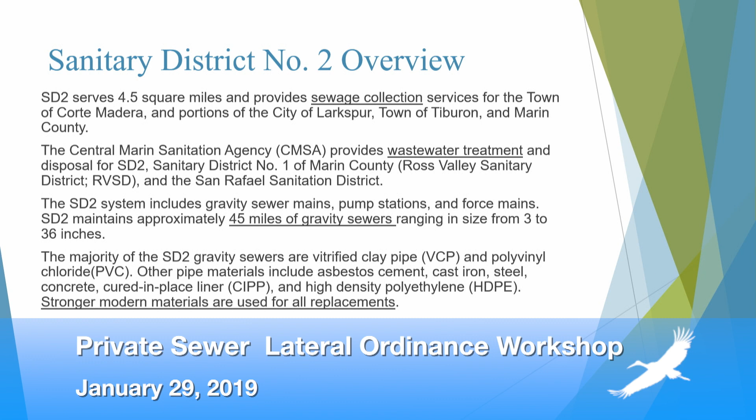This is just kind of an example of when you see these really wordy slides - what matters to me in the delivery of this is that you know that Sanitary District 2 is a sewer collection agency. We don't treat wastewater. The Central Marin Sanitation Agency, they do the treatment, right? So we deliver the sewage to them. They charge us around $1 million a year to treat the sewage, and you all pay for that through your sewage fees, and they treat the water.

A little bit, so you know how we have a gravity system, we have pump stations, we have force mains. Does everybody understand the difference between a force main and a gravity main? A force main is pressurized, so it has to be watertight. We force sewage water down the main at pounds per square inch, anywhere from 10 to 100 PSI. So if you pump up your bike tire to 100 PSI, that's a lot of pressure in there, right?

One of the things that's interesting we'll get into is sometimes some of our pump stations pump through the force mains at such a high pressure that the other mains that come in downstream can't force enough water in there. So we're having to upgrade our pump stations downstream simply to be able to have wastewater enter the system when there's high flows because the force is so high.

We have 45 miles of gravity sewers. One of the things that Fernanda, Todd, and I are working on is that vitrified clay pipe was the standard from 1900 until about 1970 or 80, and it doesn't hold up well. It does fine if there's no change, no settlement, no weight. Clay pipe can do fine, but for the most part, almost all of our clay pipes crack and break and are imperfect. So when I say we're going towards stronger, more modern materials, that's because we know we can do things a lot better. As we replace portions of the sanitary district gravity mains and force mains, we no longer allow clay pipe. You cannot replace anything with clay pipe anymore, it's outdated technology.

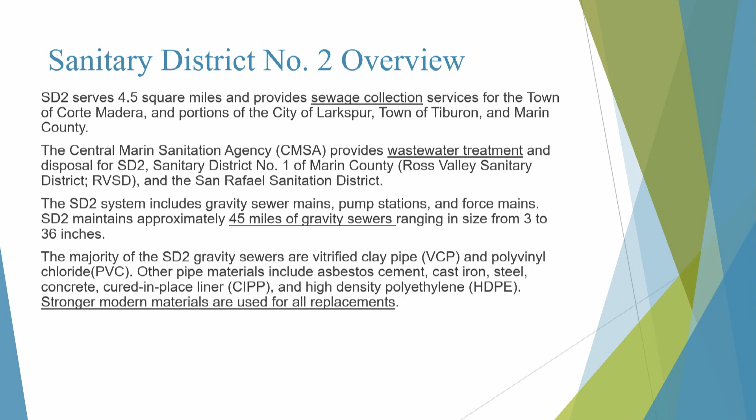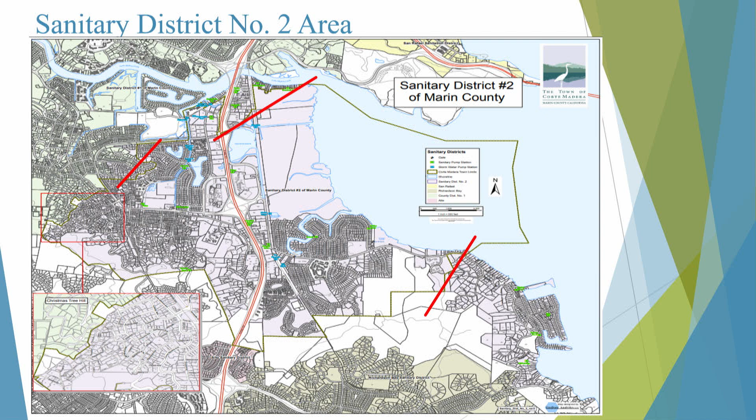So SD2 is a subsidiary district of the town of Corte Madera, but it is larger. We have about 5,800 laterals within the district. I think it's more like 4,000 or so single family homes in Corte Madera, but 5,800 laterals. So you can see how much larger the district is.

On the pump stations, we have 19 pump stations. Sometimes when you follow sanitary district or council items, you hear this term pump stations. This is just how we move the water, in this case the wastewater. We have 10 flood control pump stations and 19 sanitary district pump stations.

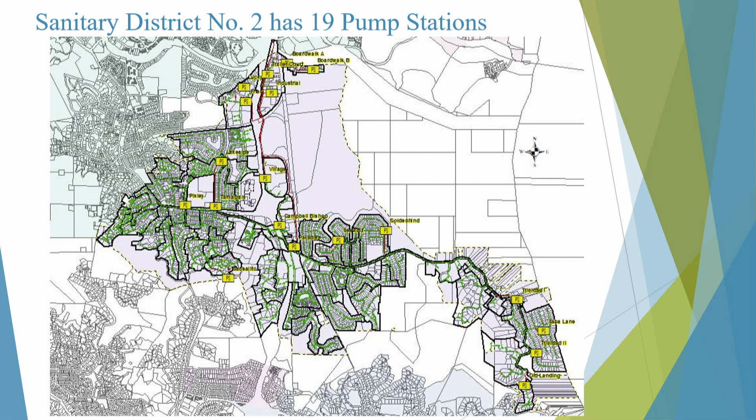Does anybody know what the largest pump station is for the sanitary district? Guesses? Paradise. Todd knows, Paradise. So here's all of them and the areas that they serve, and you can kind of see we have them all named.

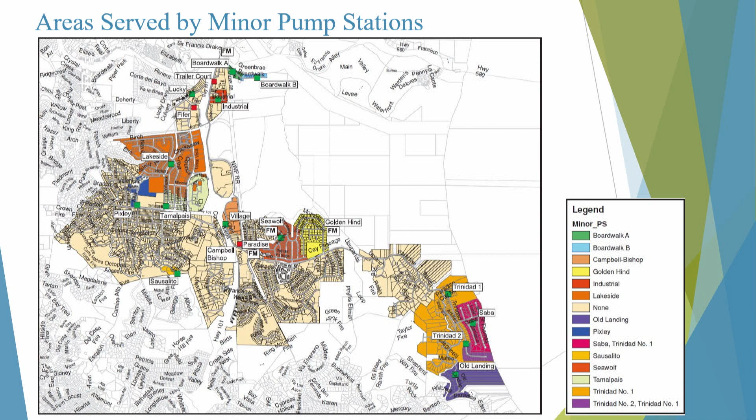One of Fernanda's jobs right now, since she started working with us on July 1st, is to evaluate the age, functionality, and control panels of how all these pump stations are working. What she's told me for the last 6 months is a lot of them need work, a lot of them need replacement, a lot of them need new control panels. So we're using your sewer fees to invest in the system.

So here's just how much Paradise is. Of all the pump stations, they feed Paradise. Right now we estimate around 90 to 95% of all effluent comes through the Paradise pump station. That's about a $20 million facility, and it's state of the art.

One thing we should do is have a tour of it. I would love to set it up, to open it up to the community and walk you all through it. It doesn't smell great, but it is fascinating to see how the pump station works.

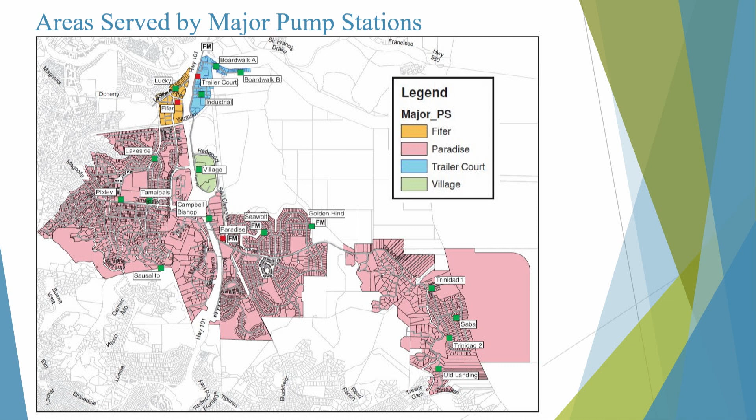So this is that example I was giving you. Fernanda is managing the Fifer pump station upgrade project right now, which is $700,000.

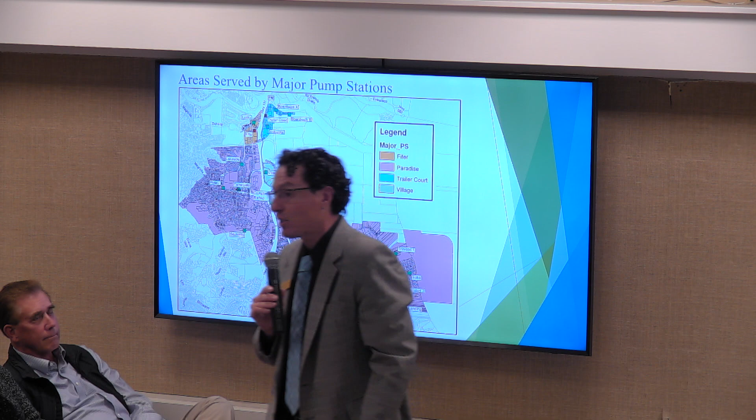One of the problems we have at Fifer is in the wintertime when Paradise, the force main for Paradise runs this way, and we deliver everything to CMSA up here by Larkspur Landing. But when we have heavy flows and all the pumps for Paradise are pumping, Fifer tries to pump water into the main and they can't get it in. So that's a problem, right? Then Fifer pump station backs up, and we've had that issue. So it's one of the reasons why we're upgrading Fifer.

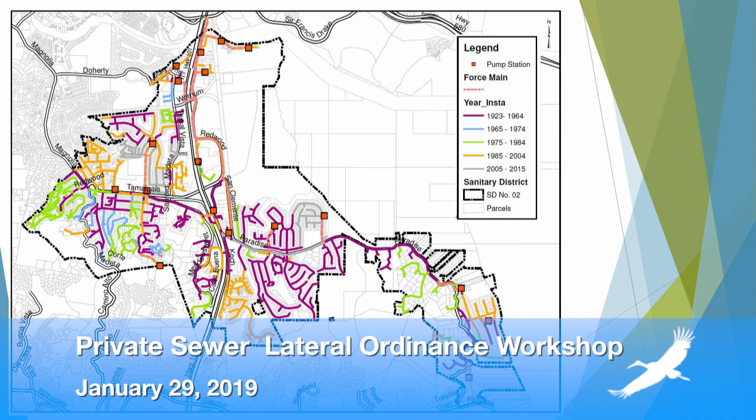Another way to look at it is the year installed. Fernanda's really good at GIS, Geographic Information Systems, in this map. If it was installed between '23 and '64, it's purple. The newest ones are gray, so that's the age of the system. This helps us understand one of the tools we use to determine where to put investments. The older tends to be the need of most investments.

So to the PSL, the purpose of the ordinance is to provide for the operation and maintenance of SD2 wastewater conveyance, right, because we just deliver the water, and the treatment facilities, for more safe, reliable, and serviceable manner. You all know the board adopted the ordinance on June 4th, and they asked for more outreach, they want the community to know more about it. So we're a little late to the game, but we're happy to do this workshop and others if needed. The other point is that the ordinance affects all property owners in the area.

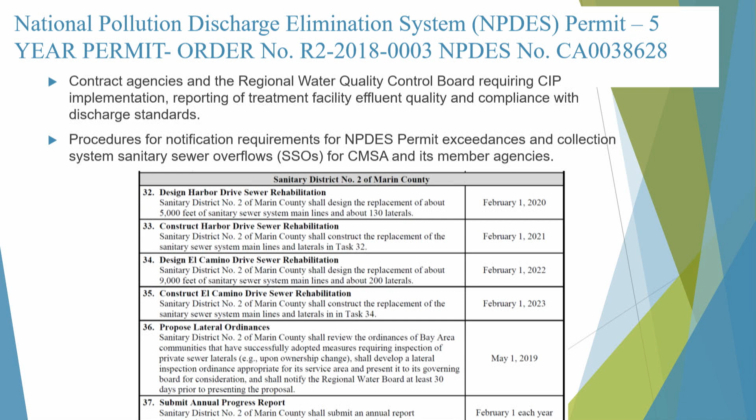Fernanda found some great graphics, which is another reason we wanted you to have this handout to take home. We use the term I&I for inflow and infiltration. In black you see what inflow is, and in white you see infiltration. What happened during that February 2017 storm was the infiltration test failed. We had a whole bunch of infiltration into our system, which is why the volume at the sewage treatment plant went up so much.

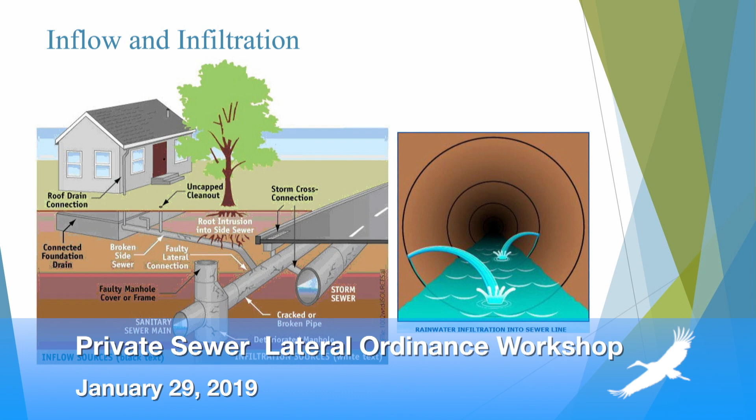Just so you know, there are multiple levels to treat wastewater. When I worked in Sonoma County in Santa Rosa, they had built a tertiary treatment plant, with three different levels of treatment. The water comes out, and you'll see some board members occasionally drink tertiary treated water - it's more of a publicity stunt than anything else. This is tap water. What you don't typically do is drink secondary treated water, and that's what we have at CMSA.

The way a secondary water treatment plant works is you use microbiota that digest and process the wastewater. Then it's clean enough to discharge into the bay, though not clean enough to drink. The balance of the microbiota at the treatment plant is super important. If you think about how many microorganisms you need to treat 9 million gallons in a huge pond, what would happen if you put 140 million gallons in it? You would probably just wash all the microbiota away, and your whole ability to treat future wastewater goes away. So it's a very tricky balance.

So what CMSA had to do in February 2017 was bypass - they had to send what amounts to raw sewage into the bay, or ruin their entire treatment plant. That's part of the reason this is so important, because of the balance of a secondary treatment plant.

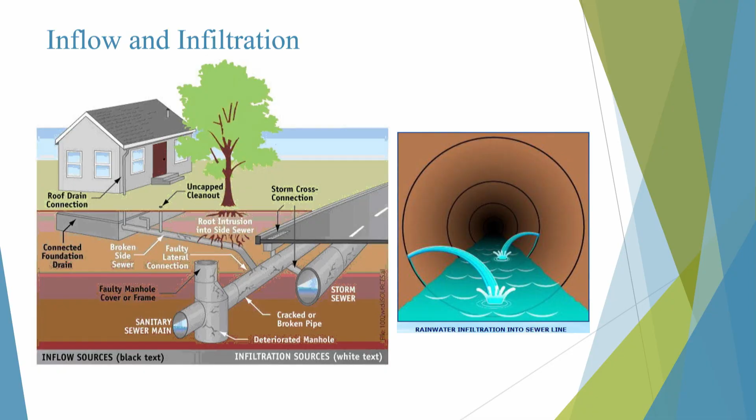This is straight out of the ordinance. Again, this is one of those slides with a lot of information. But just for definitions, what is a sewer lateral? It's owned by the property owner, just like owning a roof, a wall, or a driveway - it's something you own. But it conveys sewage from a building to the sanitary district's collection system. It's broken down - I know Roy has his favorite version of a graphic, which we can talk about in Q&A - but we sometimes distinguish between upper and lower laterals.

It's all, according to our ordinance, owned by the property owner, including the connection. So the lower portion is typically between the property line and the main. The upper portion is between the property line and the building.

And cleanouts are required. Before Fernanda got here, there wasn't a lot of attention paid to cleanouts. But now, when she reviews permits and looks at new development, she requires cleanouts to be put in so that we can easily access the system and make sure it's clean. It also protects your home, because if the main gets plugged, the sewage, instead of going inside your house at the lowest point, comes out outside. So you can see it, you can smell it, but it doesn't damage your property.

That's super important. So absent cleanouts, if you think about it, if there's a backup in the system, I don't know if anyone in this room has experienced it, but it does happen that sometimes the sewage comes all the way back up and spouts out in your bathroom, and that is a worst case scenario.

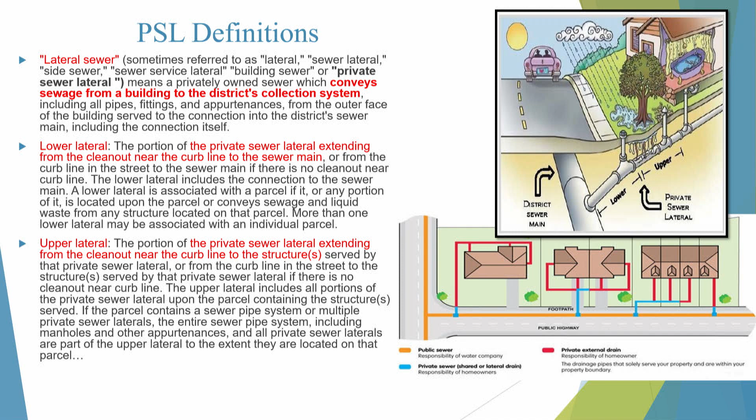Okay, so upper, lower. Now here are the triggers. These are the four triggers.

So let's say you want to improve your home, remodel your kitchen, add a secondary unit, whatever it is. If you're doing more than $50,000 worth of value, you meet a private sewer lateral ordinance trigger. So we say, if you're doing $50,000 of work, we want you to inspect your lateral, send a camera down there, and tell us what condition it's in. If it's in good condition, great. If it needs repair, you need to repair it as part of that project.

If a property is sold or has a transfer of title, that's another great time to say, okay, I'm selling. I think the median price in Corte Madera is $1.4 million. If I'm selling my $1.4 million home, it's a great time to make sure that the lateral is inspected and replaced if needed.

Another time is when a capital improvement project is led by the town, say repaving your road, or by the district. A district capital improvement might be: we've inspected our main, whether it's a gravity main or a force main, and we need to do an improvement. Therefore, we want to make sure that all the laterals connecting to that main are also improved at the same time.

And then this is kind of the catch-all. If we believe that there is a public health threat, that a spill has occurred, or that a spill might occur, then that is another trigger that we want to protect against.

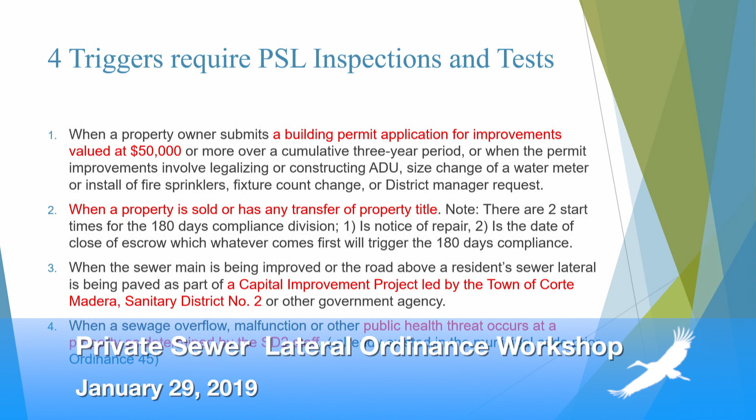One thing that Peter didn't mention: if a building permit is adding a bathroom or fixture counts that is under $50,000, but is adding fixtures that will generate more sewage waste, like a kitchen, we also inspect the sewer to make sure of its condition, because you're putting more waste through it.

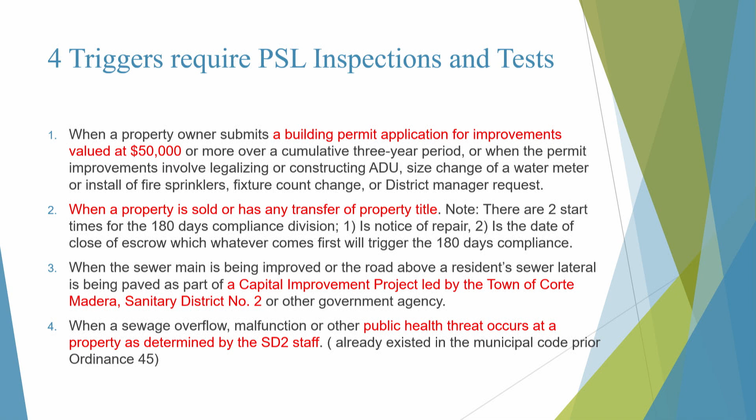Okay, good call. So this is the last slide I'm going to do. I'm going to take a quick break, and then turn it over to Fernanda for a couple slides, and then we'll power through to the end. I think we're on target so far.

So this is a section of the municipal code that I thought everyone should be aware of, 21.20.060. This relates back to the previous slide in that the code pretty clearly spells out that the property owner is responsible for maintenance and ownership, as well as keeping it pressure tight and in good working order at all times, which makes sense. If we're talking about conveying sewage, we don't want to say your sewer lateral should be good 200 days out of the year—we're saying 365 days out of the year. We want that lateral to be in good working order and pressure tight.

So I'll turn these next two slides over to Fernanda.

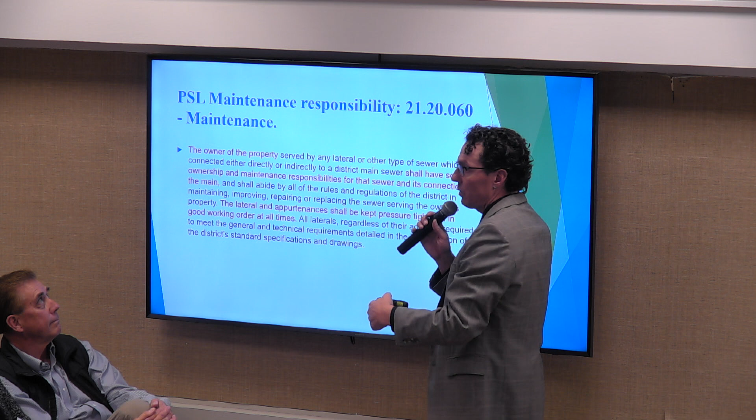The one point there that you just made: now, we updated our ordinance, but our previous ordinance, enacted for a few decades, had the same language on ownership—it said the same thing. The only language that's new is this pressure tight language. All the rest of it—who owns it, who maintains it, keeping it in good working order—is all the same. But we didn't really have a way to say how all this was happening. So when we talked to our legal team, Fernanda looked at all the other ordinances in the Bay Area, and we said, well, this is kind of the tool. Good point, Todd. The one thing we changed was adding the term pressure tight.

The only way to see if there's leaking in the system is to pressure test. If you don't pressure test, you can't really tell by visualizing that the pipe isn't leaking.

So exceptions: we're giving an extra 6 months for people that have shared sewer laterals. Usually with the notice to repair, we give 6 months, 180 days. For shared laterals, because they need to coordinate with neighbors and work a deal to make the replacement, we're extending another 180 days. So we're giving a year for the neighbors to get together and fix the lateral. If there's no agreement, we recommend separating the lines so each one has their own sewer line, and we work to guide you on that.

But it's your responsibility. Most have agreements with neighbors or easements. If you don't, and you know you have a shared lateral, you should work on an agreement or easement with your neighbor.

We are giving 3 years to homeowner associations that manage their laterals, so they can apply for a 3-year blanket. They can inspect their whole system by televising it, and we work with the HOA, with a 3-year blanket, to repair it, fix it, and have it done.

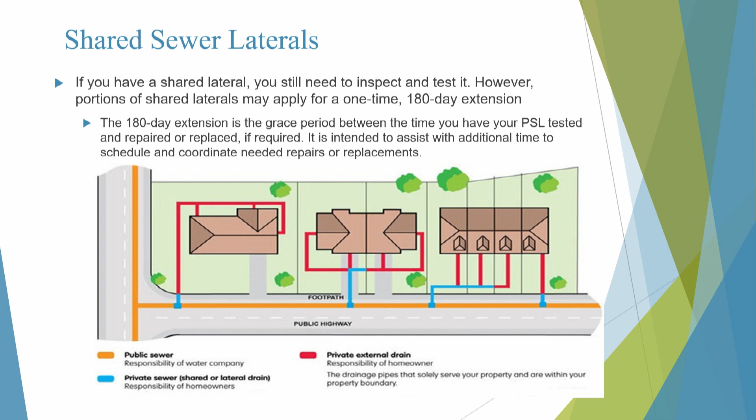Fernanda talked a little bit about HOAs. Who's a member of an HOA here? Okay, so this is good information for you guys to take home and look at, and talk to your HOA board or president about what system your HOA has.

So this is a slide I want to spend a few minutes on, and this is, I think, in Todd's vision, one of the reasons why we want to have this discussion with the community: possible private sewer lateral funding options for town and sanitary district-initiated projects.

A couple of things that may happen, and these are things we'll take to the board to discuss. If we're doing mainline repairs, let's say we have a sewer main line, and Harbor and El Camino are a couple of streets where we've inspected the main line and they're due for repair. It doesn't make a lot of sense for us to send everyone a letter saying we're going to replace the main line, so please replace your sewer lateral that you own and are required to maintain, because then you're going to tap that lateral into the old main or the new main, probably the new main. So we would rather coordinate it all. In that particular case, it makes sense that the lower lateral becomes part of the capital improvement.

At the same time, we would ask you, from the property line, from the curb face, whatever it is, up to your home, that's something you could do and should do at the same time, so that we have a new system throughout. Another idea that Fernanda has been touting for the last few weeks is this economy of scale idea.

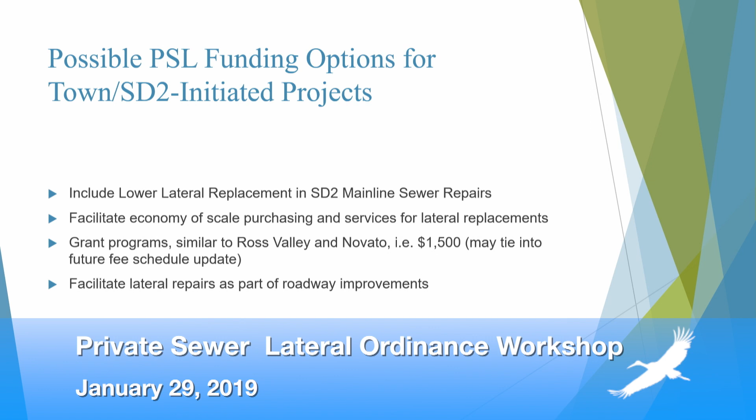So if it cost you, I think in Board Member Beckman's neighborhood, it's running like $5,000 to $7,000 because the laterals are really short and it's flat. But if you live up on Christmas Tree Hill and have a really long property, it's going to be more expensive. And then the last bullet I had there was just facilitating lateral repairs as part of roadway improvements, which we're currently doing, but we don't have an official program for that.

Todd, did you want to add anything else to this slide? No, for me, this is where the rubber meets the road, okay?

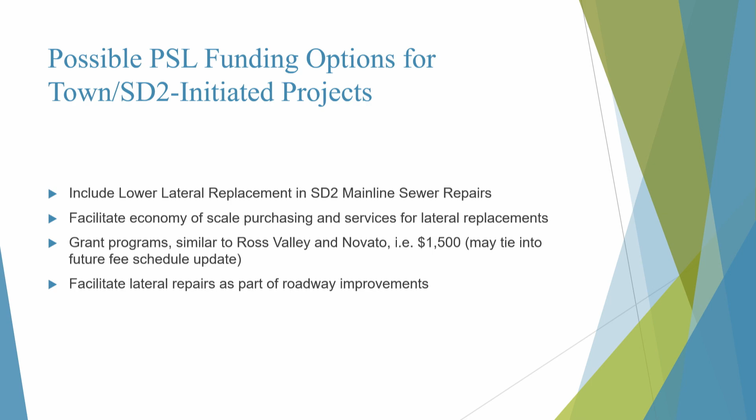And so on a town-initiated project, think about us: right now we have approximately $8 million in the bank for capital improvement projects, and we bring in about $4 million to $5 million a year as we continue with that infrastructure plan. So a lot of it's paving. On town-initiated projects, like Peter said, you may have a whole street with 100 laterals. So what we want to do is the partnership program.

That's like when we think about sidewalks. We want to improve our sidewalks. Well, the residents are responsible for sidewalks. But to pay $6,000 out of your pocket, even if you have six months advance notice, is a lot for us, okay? So what can we do to limit the cost, share the burden, but have improved infrastructure?

Really, as we go through this, I want you to think about it, and we don't need to make a decision tonight, but it's really for council to decide, actually the sanitary district, the board. But really, like Peter said, if we know we're going to do the infrastructure project, we know a year in advance, and then it's like, okay, let's get economies of scale, right?

So instead of $8,000 for a lateral replacement, it's $4,000. And then now the cost is $4,000 to the resident. Well, then let's look at an annual grant program. It's first come, first serve. We know what the projects are. We budget whatever that is, $250,000 a year, $500,000 a year. And it's available to then split that $4,000 cost with the residents. Is that something?

And it's just one concept. Like we put $1,500 up here. Ross Valley does $1,500. Novato does $2,000. We're talking concepts here, and I think that's where there's going to be a lot of questions.

I see two hands that are ready to be raised. I'm happy to point that to you, but let me, thanks for that, Todd. I only have a few more slides and I'm not going to spend much time on them. So what I'll do is finish this up and then we'll go to Q&A, and I think that'll be perfect.

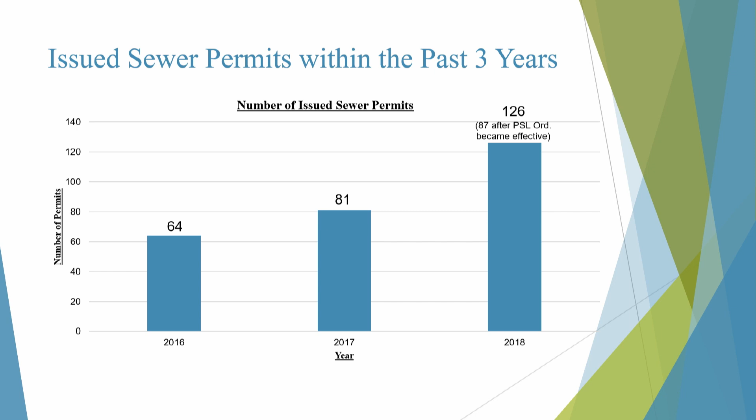I'm not going to run through all these, but this is us as staff saying we need help from the community. We are not on your street every day, we don't pass our noses in front of your homes all the time, and you do. So if you smell something that's wrong, if you see something that looks wrong, let us know. Pay attention—sewer spills are terrible. We're right on the bay, and the water typically goes into the bay, and it's not good for anyone.

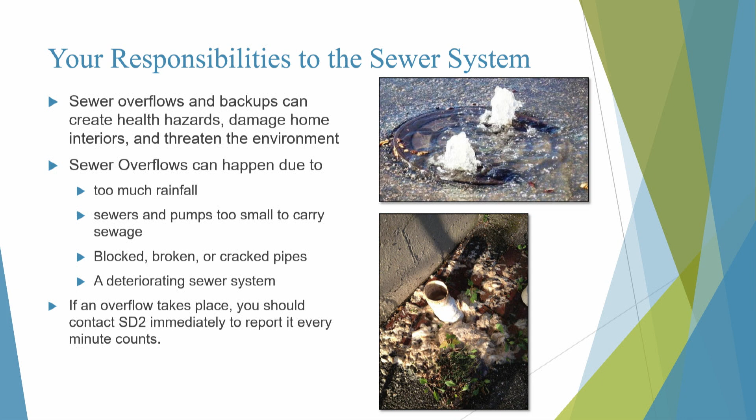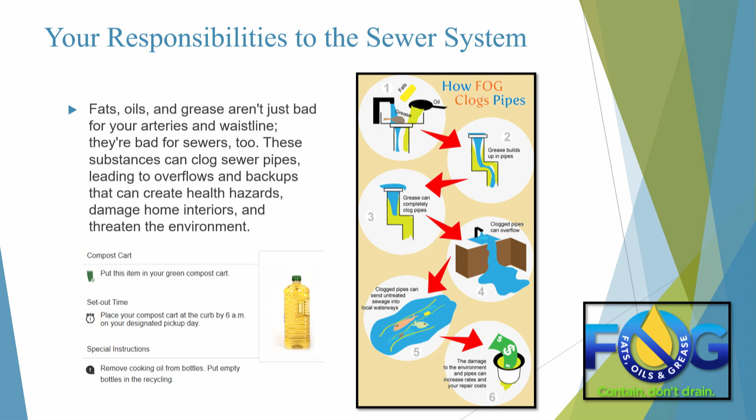The next slide talks about specifics, phone numbers—take this home, be our eyes and ears on the street, and noses. I like this line: did you guys know that fats, oils, and greases aren't just bad for your arteries and waistline? They're bad for the sewer system too—they cause blockages and clog our sewer pipes.

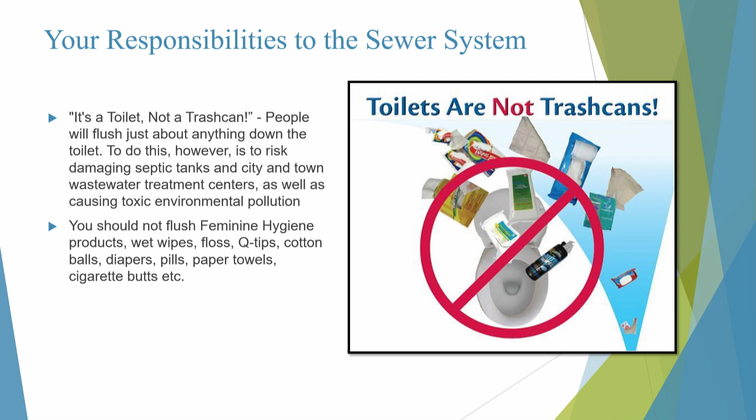Toilets are not trash cans. This is just a good little reminder—have your trash can next to your toilet, or one under the sink, but throw all your trash in there. The only things we really want going in are human waste and the paper it takes to clean it, and that's about it. In fact, for those of you who travel, you know that most of the paper in other parts of the world doesn't even go in—it's thrown in the trash because it's less for the system to have to clean.

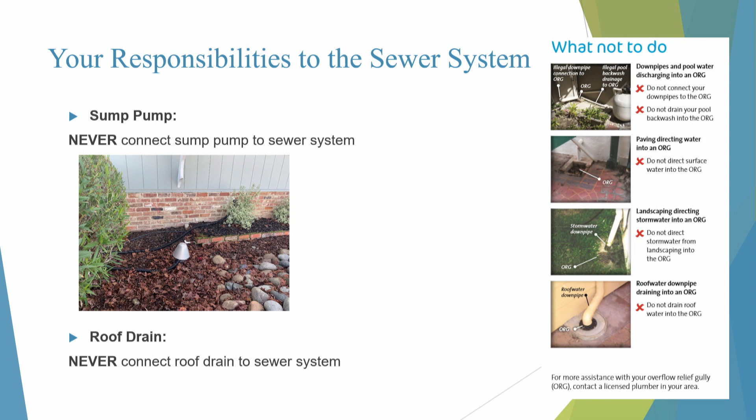Again, another slide on: don't connect your sump pump to the sewer system. Don't connect roof drains to the sewer system. Those should all go through the storm drain system.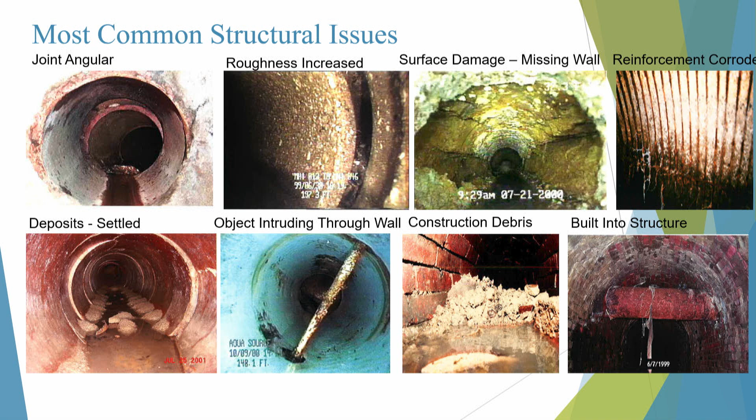I'm not going to walk through all these pictures. They are examples of the different types of things that Fernanda is an expert in finding. When we look at the videos, we see separated joints, offsets, fractures that are longitudinal, holes in the system. So these are all things that we look for, and that you now have examples of to take home and share.

So I do want to go back to Q&A, and I know Roy had his hand up, and I can go to any slide you want, but I wanted to thank you all for your attention. You did great, and I'm happy to have this discussion. Todd's going to pick up his daughter at 7:15, so I'm going to shoot for that as our end time.

Hello, my name's Roy Wolford. I wanted to follow up on what Todd was talking about, and also Peter, in coming together as a community and having wide area replacements of the sanitary system. And you were mentioning, Peter, something about smell. When Ordinance 45 was passed, something didn't smell right to me. But anyway, thank you for laughing. I have my wife, she laughs.

Okay, one of the things I'm looking at is a macro level. So I put together a little table that showed the number of properties in the sanitary district and then the residents in Corte Madera. The number I came up with for residents, homes and apartments, is 3,802, so the 4,000 number seems right. The number I had for the sanitary district for properties that are serviced is 5,665, but that was from 2005. So the number of 5,800 seems pretty good.

In doing a lot of research, both my wife and I are finding that most of the replacement cost for a lateral, over in our area, Mariner Cove, is about $15,000 per line. $10,000 for the line, $5,000 for the street.